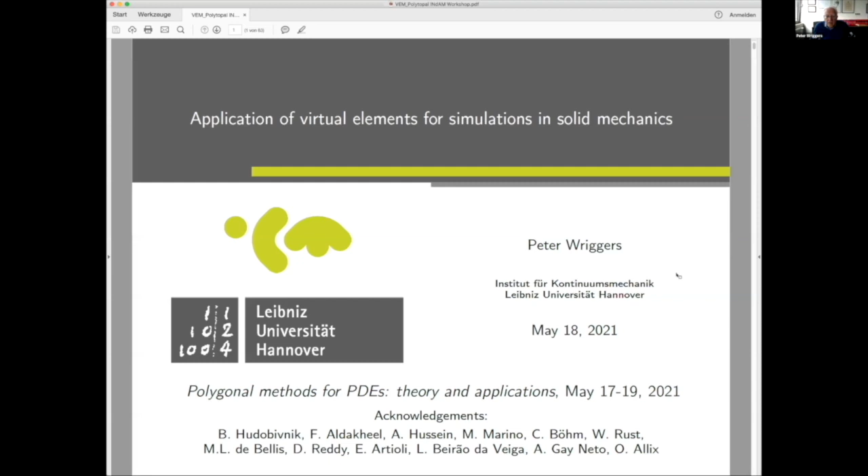Let me start with a motivation for what I want to talk about. Contact mechanics is one problem which we already saw yesterday in the talk by Eduardo. The other thing is fracturing processes, and I will talk about the benefits of using a virtual element method. Homogenization is part of my talk. Something for large strains and large deformations, crystal plasticity - the word crystal already shows, if you can see my mouse here, this is a crystal like this, which we are investigating, that you can really use the virtual element method quite nicely.

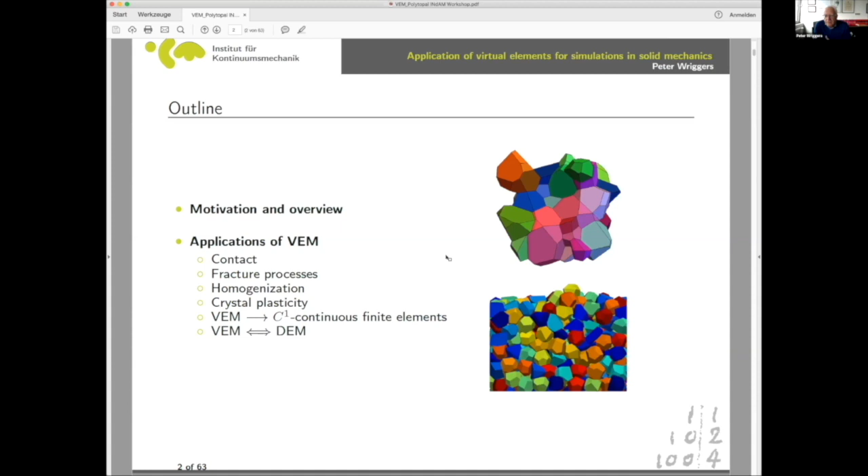I was very glad that Franco talked yesterday about C1 continuous elements. We also had a look at it, and today you will not only get the theory, but you will also see some numbers, and it's very exciting how the elements perform as finite elements. Finally, I had the idea, and we are working together with Alfredo Gay Neto from Brazil, on using virtual elements in discrete element codes as single elements which can deform and are in contact. You see it down here.

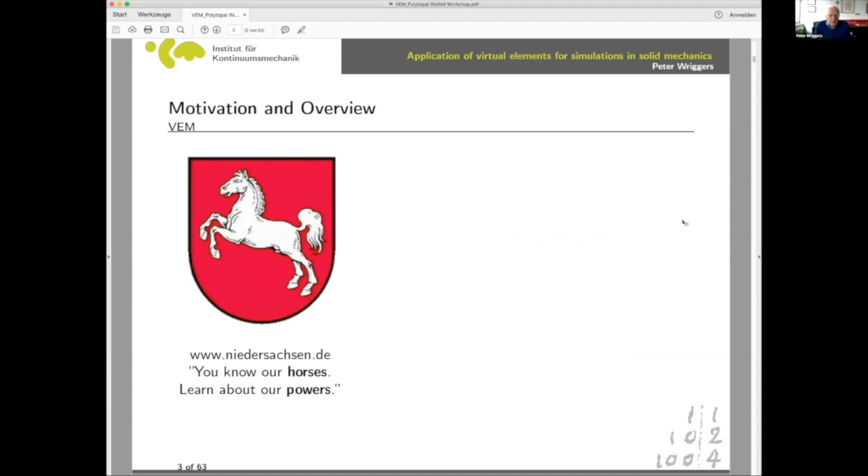Now, I come from Lower Saxony. This is our coat of arms, and while our ministry has a big thing about our horses learning about our powers, I only put this picture because everybody knows that the virtual element method is ideally suited to map into something like horses.

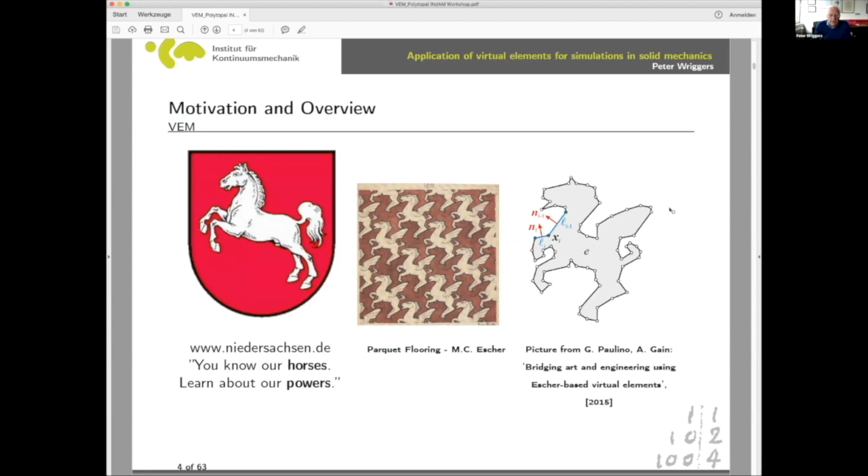What are the advantages for engineers? The advantages are that we have an element with an arbitrary number of nodes, we can have a non-convex shape - this is great - and it's basically only defined at the boundary, and C1 continuous ansatz functions are possible, which is good for Kirchhoff-Love plates and shells eventually.

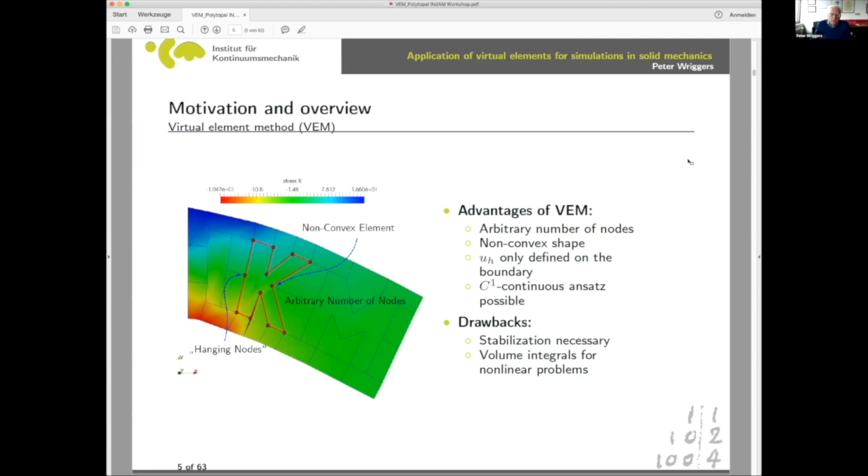Of course, from the engineering point of view, there are some drawbacks. Engineers don't like stabilizations because they have parameters which are not directly coming from the physical problem, so you have to find out that you don't get a solution which depends on stabilization. On the other hand, stabilization is quite interesting for coarse grid accuracy. The other thing, a little bit annoying, is that you cannot move everything to the boundary once you go into nonlinear problems, so you have to integrate over the elements.

Now, what is my basic interest? I have an interest in non-smooth problems. Many engineering problems are non-smooth - contact with friction, plasticity, fracture mechanics, they are non-smooth. That means you need a method to solve these problems. Of course, we want accurate solutions, which would mean adaptivity, and engineers still like coarse mesh accuracy.

Because in 2D, it's no problem - you can solve a million degrees of freedom on your notebook. But if you go 3D, you don't solve 100 million degrees of freedom, so you have to have a coarser mesh. You cannot always do refinement. Either you use adaptivity or you have good coarse mesh accuracy. So for a real engineering application, this is somehow necessary, at least to my taste.

Now, the implications of non-smooth problems are that we can quite nicely use low-order discretization schemes. Higher-order discretization schemes are always trouble - if you try to solve non-smooth problems using isogeometric analysis, it can be done, but you have to do a lot of tricks to achieve it. The benefit of using a low-order discretization scheme, on the other hand, is that your integrals, which usually depend somehow on gradients in our applications, become constant. So integration for nonlinear problems is not necessary, and this makes it an easy to implement method.

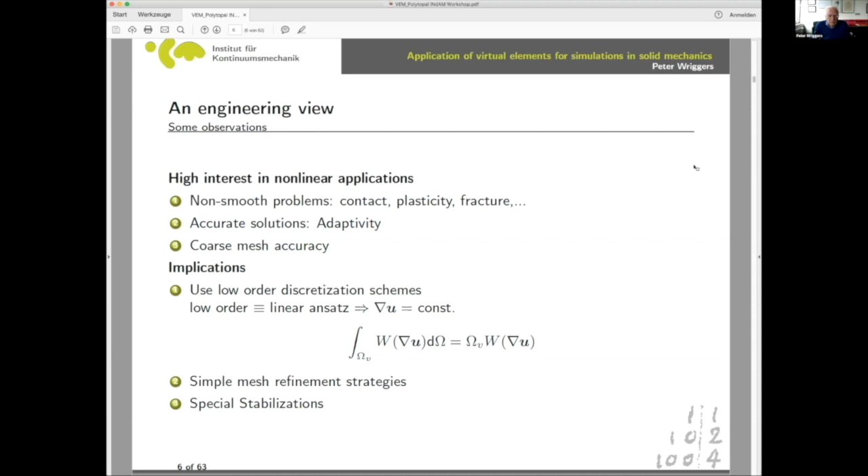What is also good with virtual elements are the simple mesh refinement strategies, and about the stabilization I have already talked a little bit. Now, the advantages of the method in engineering applications.

My first connection to virtual elements came when Franco gave a talk at a conference about the virtual element method, and I immediately had the idea that contact problems could be solved with this method quite nicely, because contacts have different difficulties if you have non-matching meshes. So from this point of view, a node-to-node concept can be used for unstructured meshes and also for large strain computations. This is quite nice.

The other thing is, if you look at fracture mechanics, your elements start to break up, and it's pretty easy to define new element shapes during crack propagation. So this is also something why we looked at the virtual element method.

Adaptivity, I think a lot of people have already said this. Hanging nodes are not an issue inside some virtual element discretizations, so this is fine. Homogenization is also a question. Crystals can be modeled with only one virtual element, which is great, but then of course you have to check whether it really works.

Again, element design: C1 continuity, VEM elements can be sort of used as finite elements, as Franco pointed out yesterday. So it's good to have a look at whether these elements are really performing well in some sense.

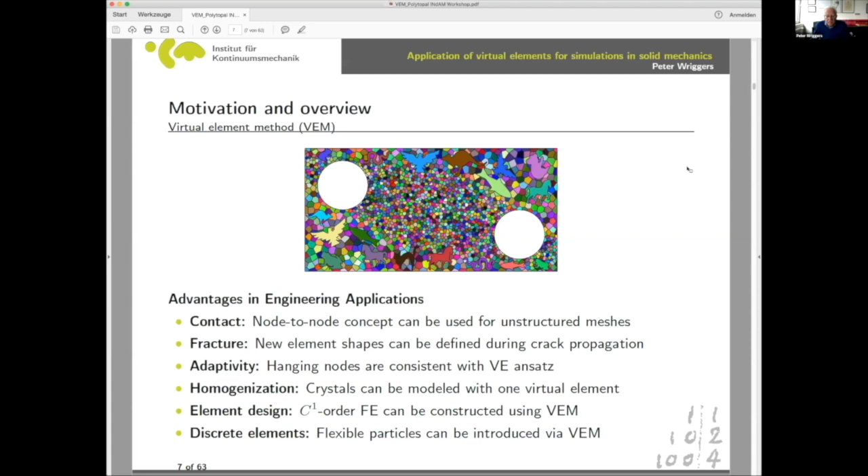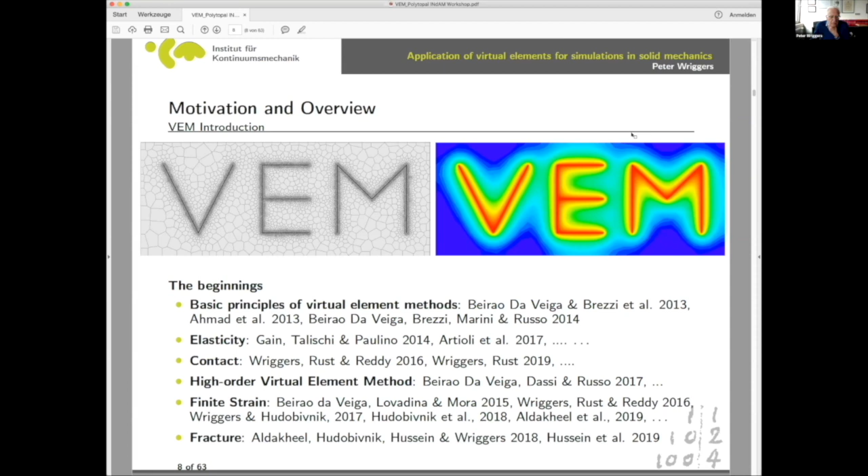Now, I think with this kind of audience, I can skip these slides. This is all about the definition of the virtual element method. As I said, I am interested here in a low order ansatz, meaning I use a polynomial of degree 1.

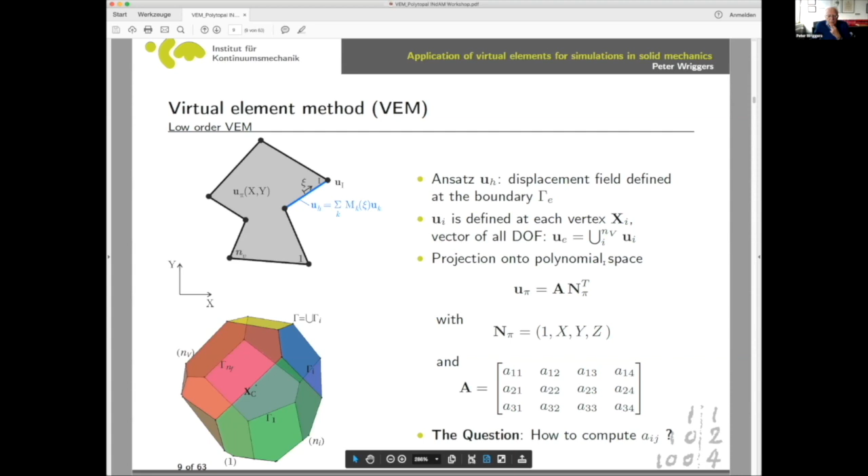Then I have to compute, in the 3D case, the projection, and this can be done quite easily because in the linear case all the gradients of the polynomials are constants. If you then use the Galerkin type projection, which is classically used, you can directly evaluate your gradient in terms of the boundary integral. And this gradient will basically already be the same as the parameters A_ij, which you need to compute in your method. So this is quite easy.

An extension today for nonlinear cases with higher order elements is given by Blaž Hudobivnik today at 12:25. So this would be sort of an extension to what I'm saying here.

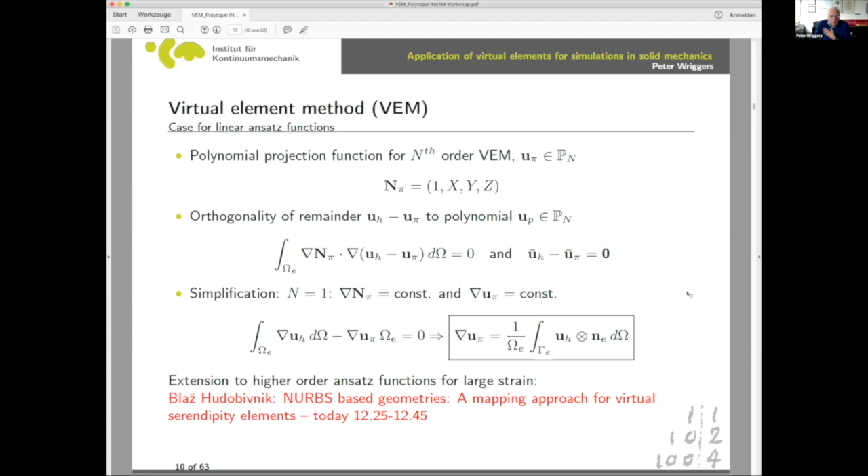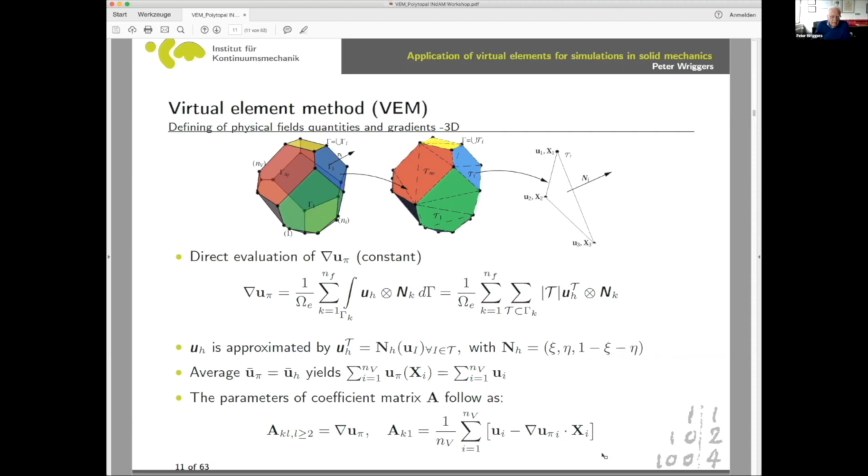So we can compute these parts, and then, once we have the ansatz polynomial of the projection, which I call u pi—I think you usually call it pi of UH, it's just a shortened notation—we can basically compute the strain energy. I like to use the strain energy instead of the weak form. I think it's only a matter of taste, you can do whatever you want.

The only thing we found out is that we always use this automatic symbolic system to generate all our matrices, which was developed by Jože Korelc. And we found out that if you start from the potential, you get the most efficient code. Don't ask me why, but this is the case, and that's why we like to use the potential.

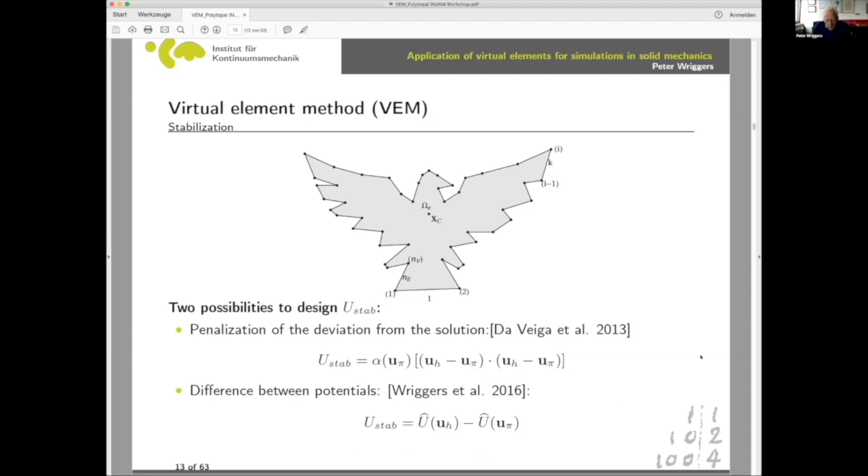Another possibility, which we introduced to get better coarse grid accuracy for some nonlinear problems, was to use a difference between potentials. This is also consistent, because the difference of the potentials, once the mesh size goes to zero, basically vanishes, and you get the solution of the consistency term.

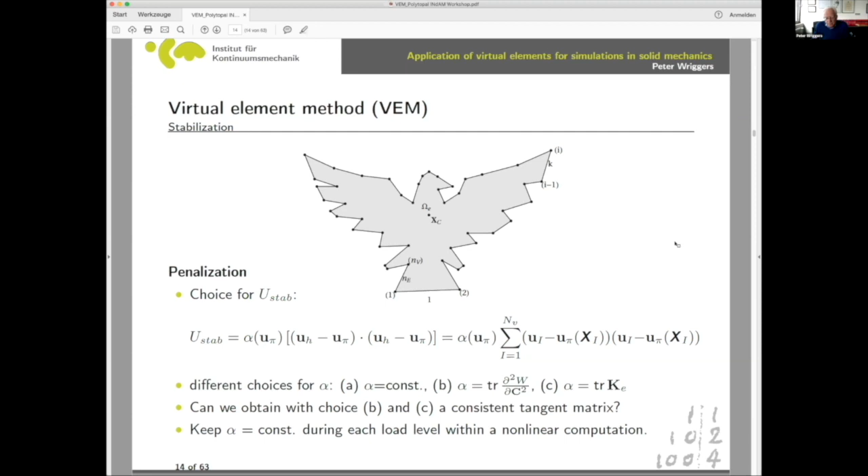Now, the problem with this penalization, which I call the classical stabilization and which is always used, is that either you choose alpha equal constant, which does not really work for nonlinear problems, or you can make alpha depend on some variables, like the stiffness matrix or the trace of the constitutive tensor. But this makes linearization a little complicated, because you then have to linearize these terms, which is sort of messy. What you can do is keep them constant during each load step, and then have some sort of Newton method within each load step, but this eventually avoids using large load steps.

With the other stabilization, there is no problem. You have to define this potential, but this can be defined as the same potential which you use for the consistency part. The only drawback is that here you have a potential which depends on UH, and now the question is, we don't know UH within the elements. So I thought to make a mixture of finite elements and virtual elements, where I use a finite element triangularization which actually has the same number of nodes, so we do not introduce extra nodes.

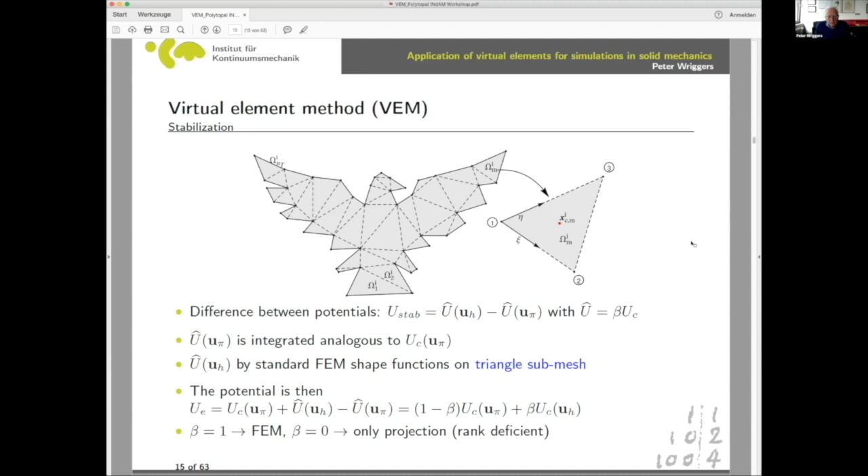This can also be done in 3D, using this stabilization for our computations. There are some papers where we showed that this works, and it actually works better than just using the finite element approximation inside, which would be obvious to check.

Now, let's first go to contact problems. Contact problems, as I said, was sort of my beginning of the virtual element method, and also had, in the beginning, a little bit of a problem to understand what was going on. But luckily, there was this Hitchhiker's Guide to the Virtual Element Method, which really helped.

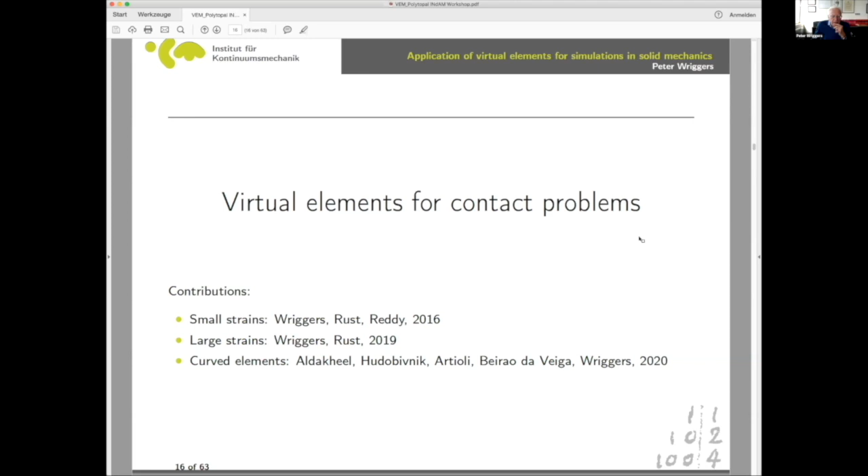We have done some work on small strains, on large strains with classical approaches, and then also used the curved elements, which were developed by Eduardo Artioli and Lorenzo Beirao da Veiga, and have done some joint work together.

So what is the general thing if you classically look at finite element methods for contact? Classically, you have a node-to-node approach, but if you have a non-matching mesh, this doesn't work. So the next thing is node-to-segment contact, which you can formulate - we did it also somewhere in the beginning of the 80s. The problem there is that it does not fulfill some sort of patch test if you have a constant load on the contacting surfaces, so this does not lead to constant stress when used in an interface.

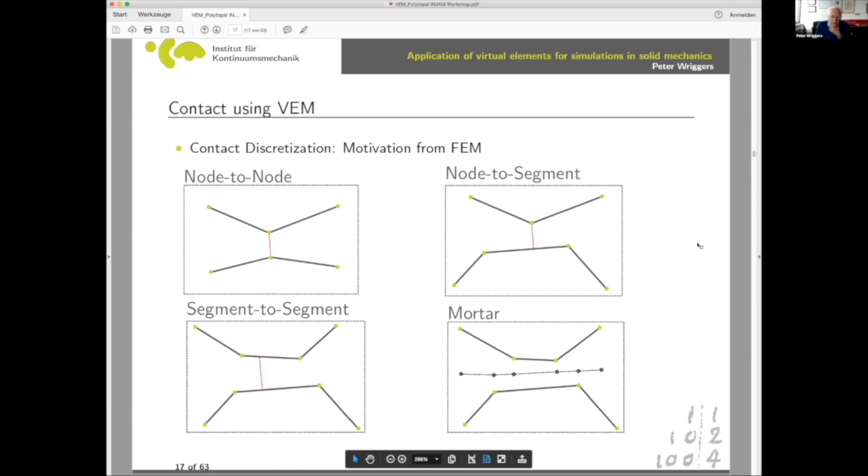Of course, engineers have seen that, and then they introduced something like segment-to-segment or mortar methods, which somehow alleviate these problems, but they are very complex and complicated. The good thing is that with the virtual element method, if you have a non-matching mesh with black nodes, you can do a projection from the black node to the opposite surface and insert a node there in your virtual element, which is completely allowed and gives a nice approximation.

So by doing this, we actually define something on the right side, which is some sort of a segment, where here is the original node, here's the projected node, and so on. You can basically define the gap, and define a linear ansatz in between, or whatever ansatz you use for your virtual element. And you can write the contact terms down here.

This is sort of a penalty approach where the gap function is squared times the penalty parameter, or you can use a Lagrange multiplier approach, or other approaches to solve this problem.

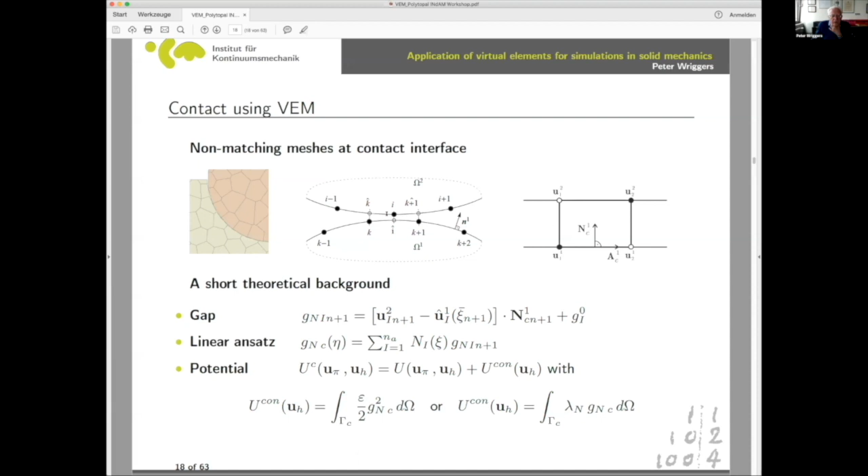This is very nice because this stuff only acts on the boundary, so you can just insert your UH, which you have at the boundary. So from this point of view, it's a very nice method, and it also fulfills all the properties you want.

This is one example already shown yesterday by Eduardo. It's sort of a ball on a curved contact surface. If you use, for example, a node-to-segment contact here, then for a coarse grid, you get

all these sort of jumps in the stress field. This is sort of the normal contact stresses here in this case. If you refine the mesh, you eventually get the correct solution.

Now, if we use our node-to-node contact with the curved method, with the curved elements derived by Eduardo and Lorenzo, then you can see that even for coarse meshes, we get a much nicer approximation of the stress distribution.

This is actually something like the von Mises stresses within this contact interface. Because it's von Mises stresses, you do not have the direct matching of the normal stresses in the y direction.

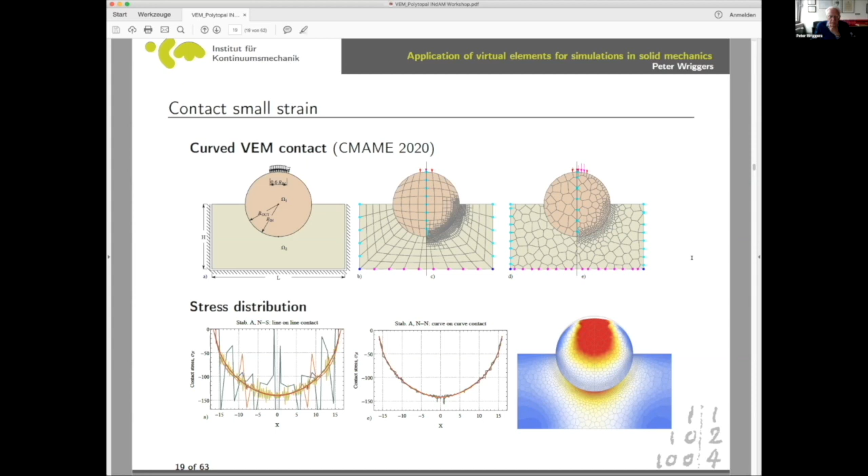Okay, this is for the linear case. For the nonlinear case, it's a little bit more complicated. I did a little bit of a drawing here.

What you have is at a certain instance, like here is sort of one point of the body above, you can do the projection for a time step n. And if you go to the next time step, of course, you have some sliding on the surface, and due to this, this point changes.

So you always have to update your virtual element mesh somehow, at least at this boundary, where you basically insert the new node. This is, of course, a little bit more complicated, but it can be done even with friction.

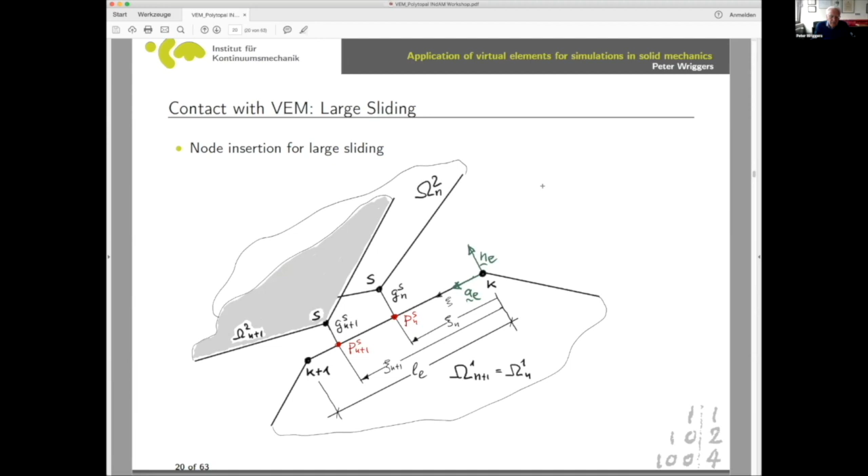We have shown that — I'm not going into the details here — but you can see if we want to run something like this, this is sort of what we call an ironing problem.

So you have this little block, which is a little bit more stiff. First you press it down. This is this situation here, and this is the stress distribution in the y direction underneath.

And then you start moving this thing on the surface while pressing down. This is a large strain computation, so there is no scaling factor for the displacement field — this is a real displacement.

And you can see that we can move this block over the surface. I have a nice movie, but somehow my PDF viewer doesn't like the Beamer movies inside, so I can't show it.

What you can see is that we get a certain reaction force. First, when we press the whole thing down, we have a linear sort of incline of the reaction force. Then when we move it over the surface, the reaction force sometimes goes away because there's less stiffness of the body underneath.

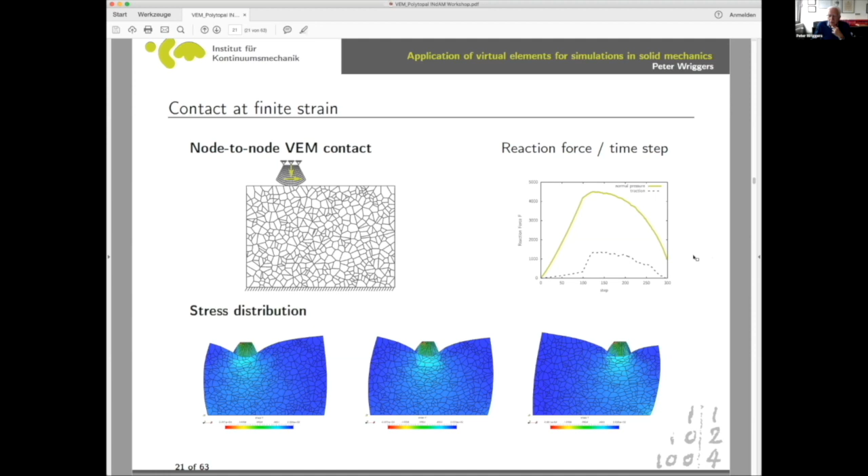So this makes sense, and this is the related frictional traction that comes with this movement. So it works for contact — this is nice. At the moment, we are working on the 3D extension of this kind of method.

The next thing is crack problems. This is also very interesting for engineering, and we have worked in different areas here — linear elastic fracture mechanics, the phase field method for brittle and ductile fracture, and combined approaches, which we also use where we coupled the phase field method with some fracture features.

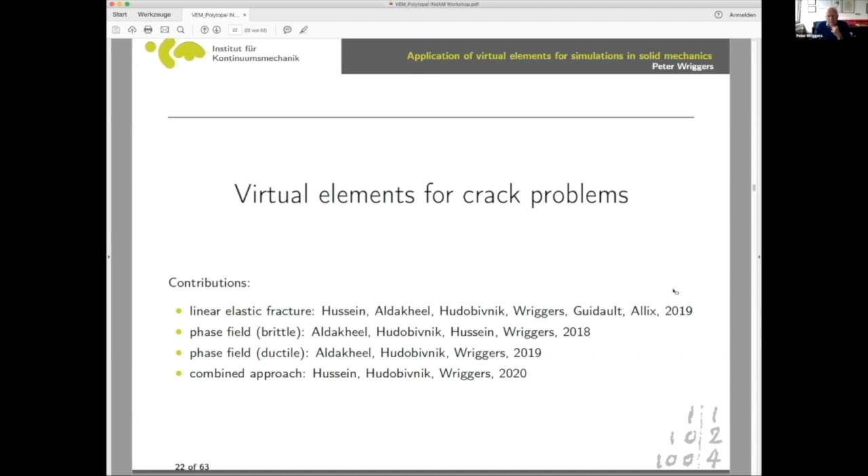Classically, you can say, okay, why do we need all these kinds of things? There's a lot of things already done.

You can see it here. People have developed the XFEM, the damage mechanics, phase field, cohesive zone elements. A lot of things have been done.

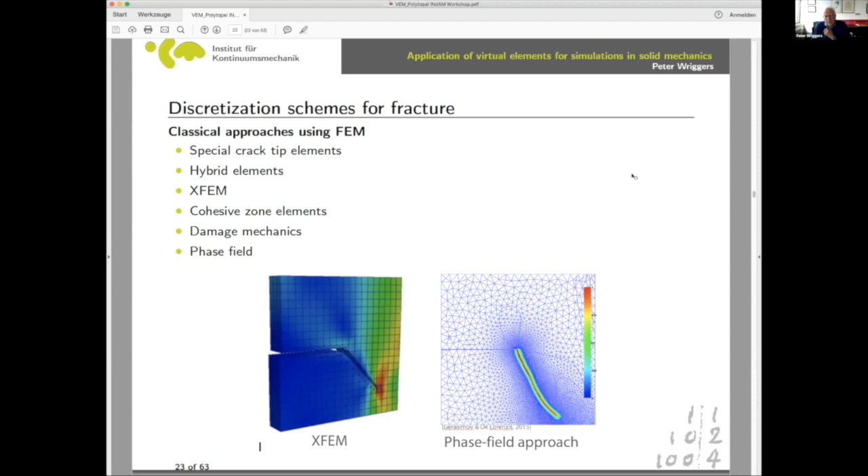Classically, if you use a phase field approach, for example, you have to refine the mesh very much in the vicinity of the crack, because otherwise this method will not produce the correct result. The problem is that sometimes you don't know beforehand where the crack is and how the crack goes, so eventually you need some adaptive structures for that.

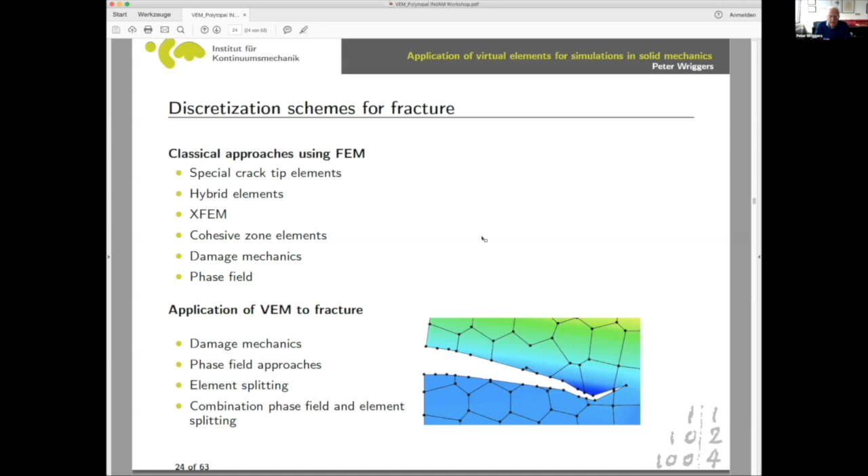Now, why could we use a virtual element method? The virtual element method has some sort of features which could be used quite nicely. We can split elements quite easily. We can even have elements like here on the right, where you have sort of a kink within the element, and this works quite nicely.

So this is basically the idea. You can somehow compute the crack path by basically opening up the crack somewhere in the element, and then look at it and cut your mesh. Now, the question is, of course, how do you do this, and how can we compute the crack opening and the direction in which the crack will go?

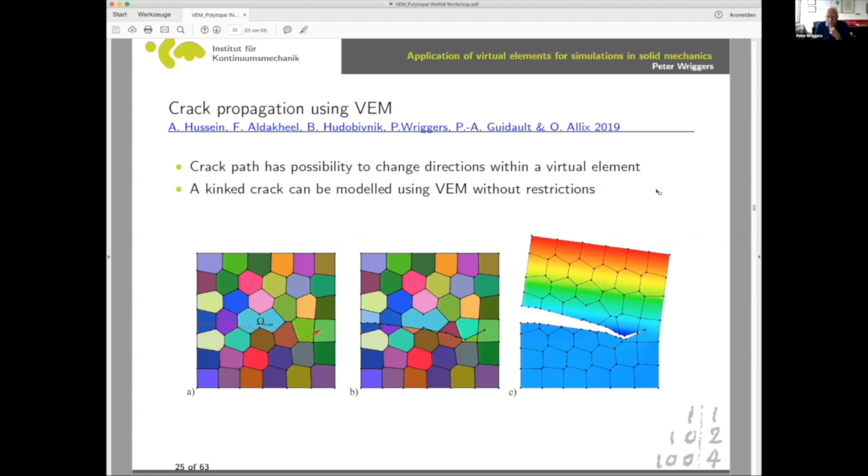This can be done classically by what we call interaction integrals, or the more general J integrals. These J integrals are contour integrals. So if this is your crack tip, you have to look around the crack tip and integrate some energy contributions, and this actually allows you to compute the stress intensity factors, which depend on this interaction integral.

Once you know the stress intensity factors, you can compute the shear stress at the crack tip, and you can also compute the propagation angle, so you know in which direction the crack will go. Finally, you can say the crack propagates once your stress intensity factor is larger than the fracture toughness, which is a material property.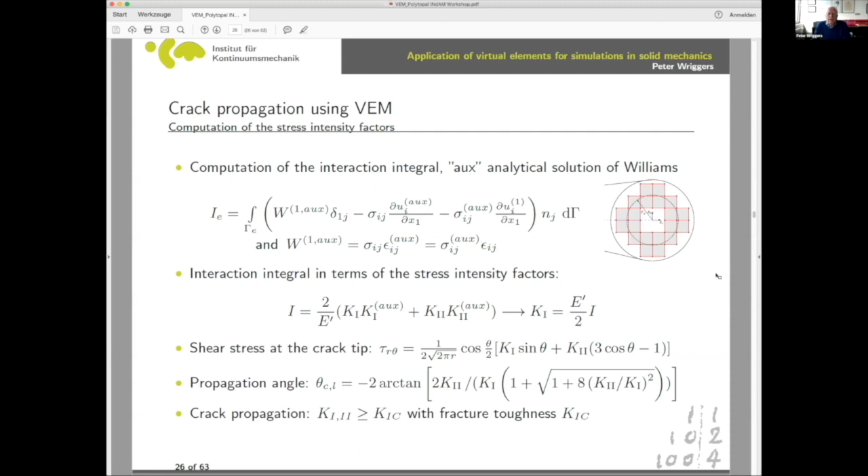Now, this is an extremely short view on the background, and the question is, does it work? So first, of course, we checked whether we can compute the stress intensity factors with the virtual element method, and we used a mesh where we put this under tension and changed the angle of the existing crack.

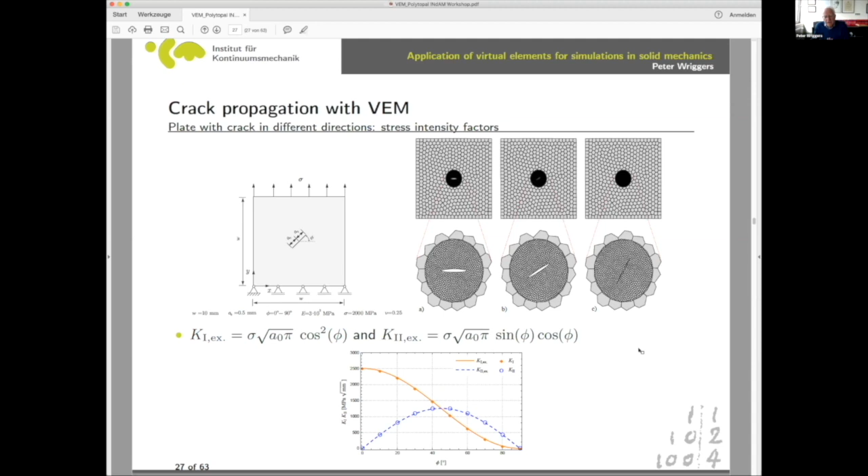Now, of course, the next step is what we do. You always have to assume in these methods how long the crack is, or what is the increment of the next crack. We can compute this angle as I've shown. So we establish some crack length, then compute the next node, for example here, and insert the crack.

Now, if in the next step we have a longer delta A, eventually we will end up within an element, and then we basically extend the crack up to inside that element, defining this very non-convex element with the crack. And then, of course, we have to keep going all the time.

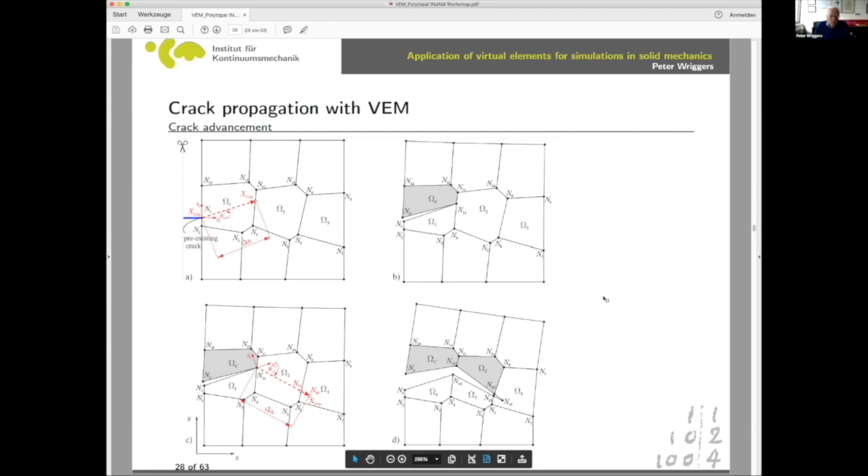Let me just show this in this example. It's a classical example. You have an initial crack here, and you have basically the shearing load up there, and you want to compute the crack path.

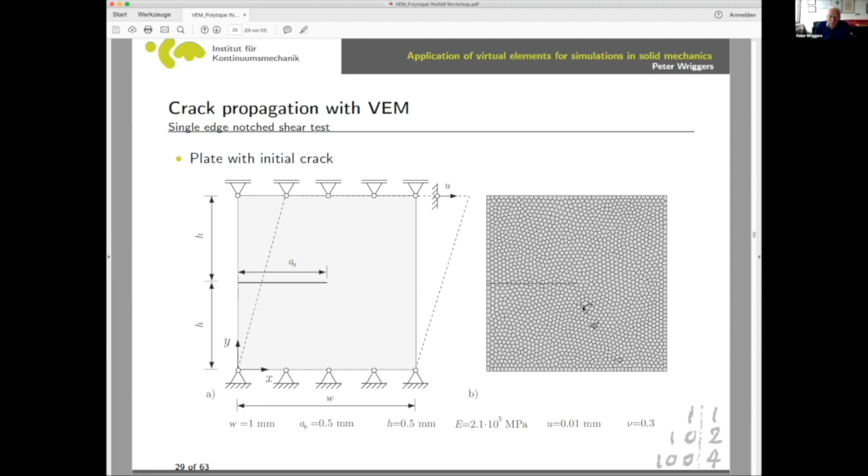You can observe that we purposely put in here some little animals instead of the classical Voronoi cells. This was only to show that we are able to compute the crack path even through these very complex shaped elements. So you can see it here. When the crack path starts, it opens up and nicely bypasses all these animals, and it doesn't matter what shape of element you have, you can really compute the crack path.

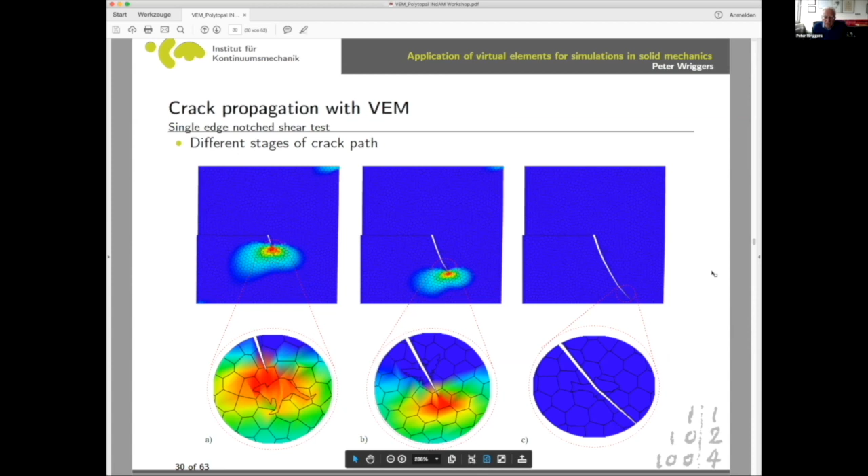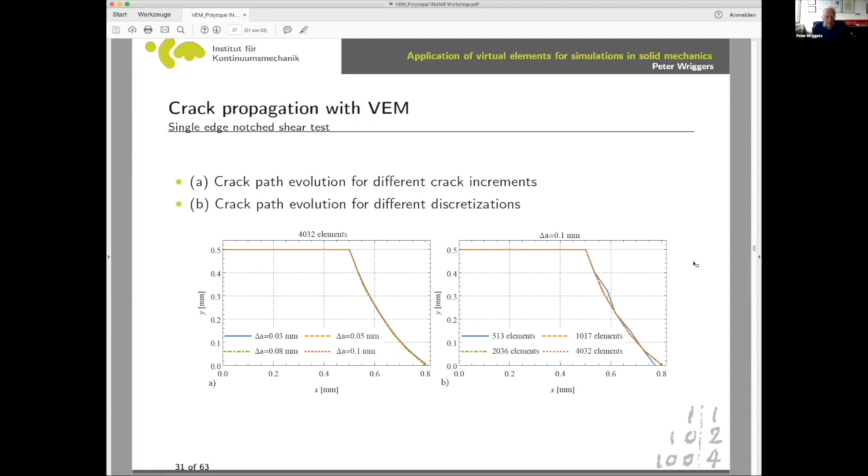Now the question, of course, is this correct? Here you can see that depending on the delta A, depending on the number of elements you take, you get basically the correct curve, which is the crack opening via X, and this works quite well. So this is actually the crack path which we can approximate. There's a reference solution, and we approximate this quite nicely with our method. So this can be applied.

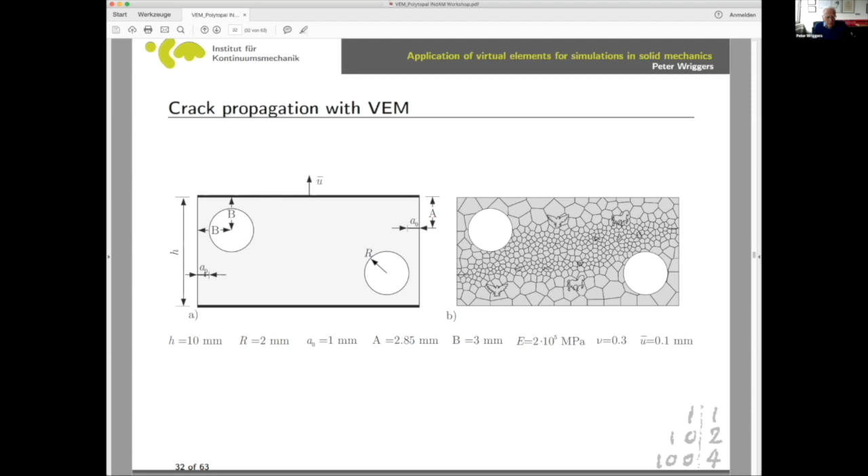For more complex situations, we pull this thing and we have two initial cracks here. You can see how the cracks basically move through the body as we increase the displacement field. You can also see the stress field, which is concentrated around the tip.

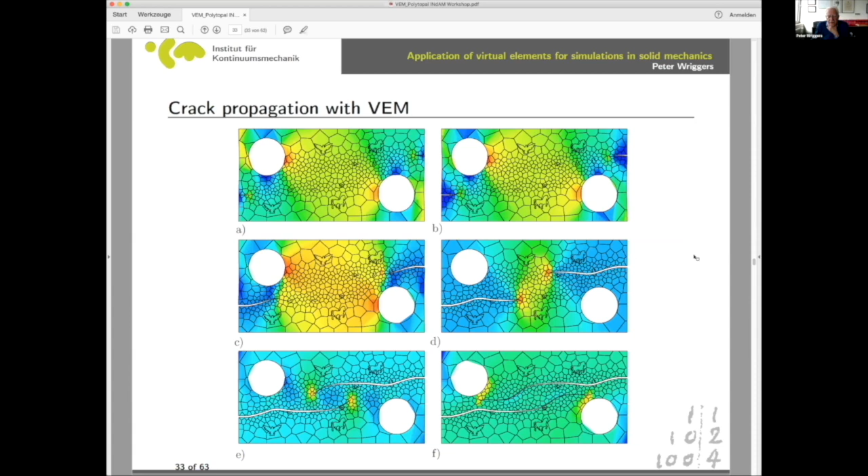Also here, the crack does not stop moving through the solid. Now, this is nice, but if you go 3D, it's very complicated to compute this interaction integral and the path. So the next step would be to use eventually the phase field method. I also advertise a talk by Fadi Aldakheel this afternoon, where he talks about virtual elements in fracture mechanics.

I just want to show what we have done. The idea was that we start with a coarse mesh, refine it, and use at the crack tip something like the phase field method. That's what we want to do. So we have to compute an error indicator, and we use here the phase field parameter to do that, which is without any proof, but it seems to work.

We can then, by this error indicator, select a threshold of elements which we want to refine. Then we can do a refinement, using finite elements or virtual elements. So we have this kind of refinement around the crack tip, which is used to compute the phase field. With the phase field method, we obtain automatically the correct direction of the crack path.

Now, the idea is that we sort of follow the crack path. Once we have the crack introduced by the phase field method, we open it up by our cutting procedure and then keep going with the crack path. So how does it work?

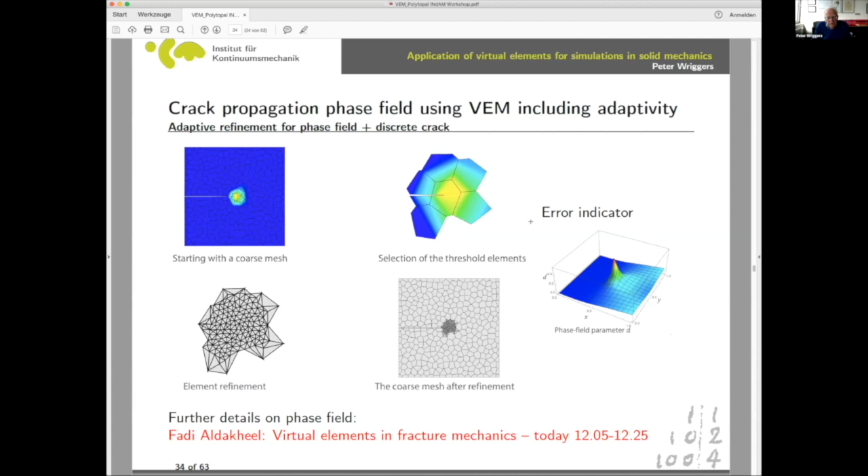We have again the same problem as before, like here. Now what we do is we basically refine the mesh around the crack tip using our error indicator. This is a solution with the phase field method. Then we cut the elements, which are here the red part, and introduce the crack, moving the refinement together with the crack as we keep going.

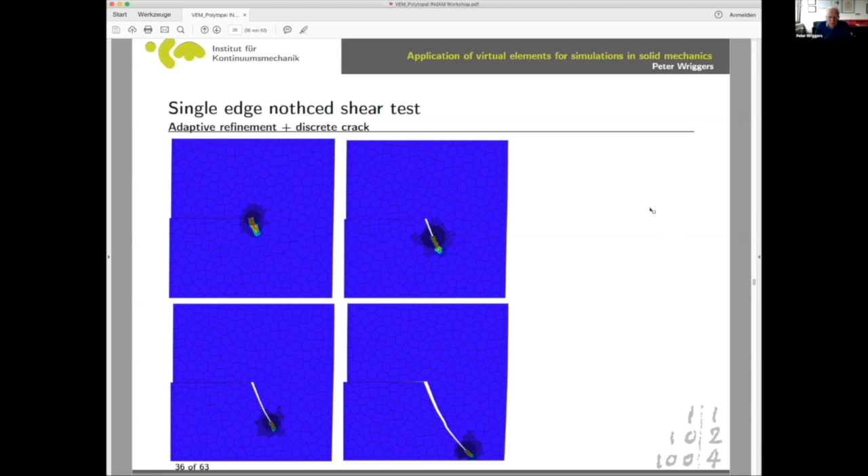So by this, we have a very efficient method because we only need the refinement around the crack tip, and we can cut afterwards our elements using our schemes, which we have developed and which is very easy when we use the phase field method. This has not been done yet in 3D, but this is actually the way you have to go in 3D, because crack paths are much more complicated and very hard to compute using the interaction integral, and also very hard to compute even using XFEM or other methods. So this is an advantage we can take care of, which we have not done yet.

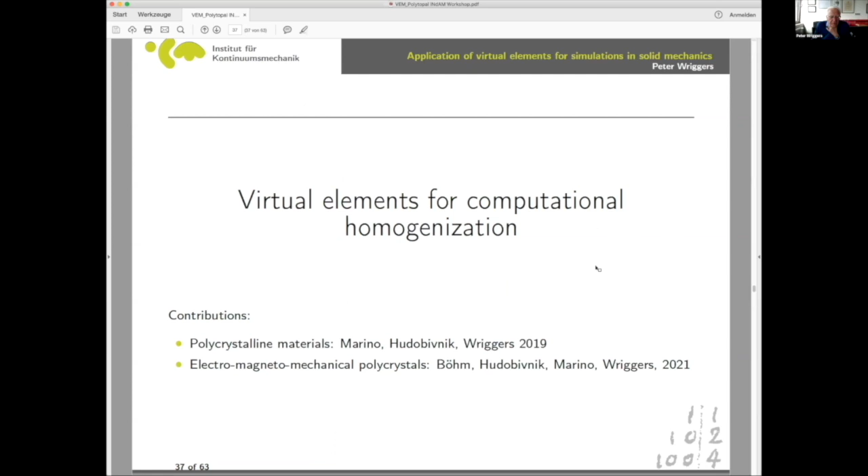Now, another topic: homogenization. There, eventually what you want to do is compute the properties of a macro material which you want to use for computation. But this macro material has a certain microstructure with different constituents, and you want to be able to homogenize it. I think yesterday Eduardo talked about this already.

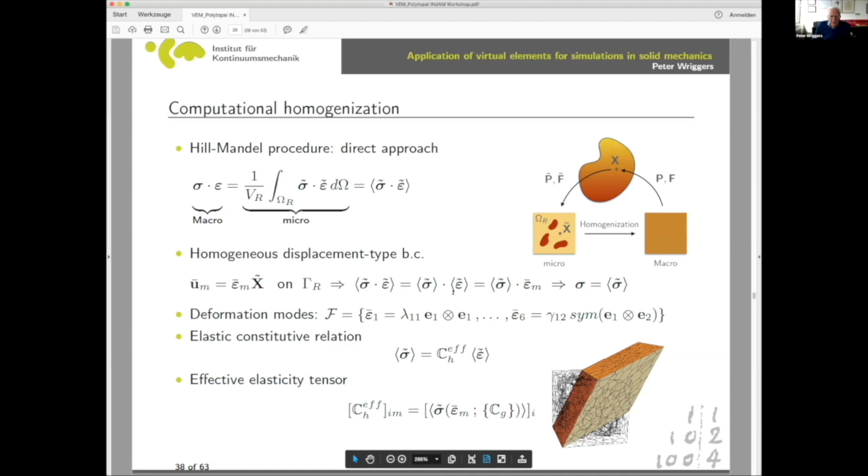So what we want to do is check whether we can use this virtual element scheme for homogenization. This here is basically all the methodology you have to do. We have to apply certain deformation modes on the microstructure, and then we can obtain the coefficients of the elasticity constants.

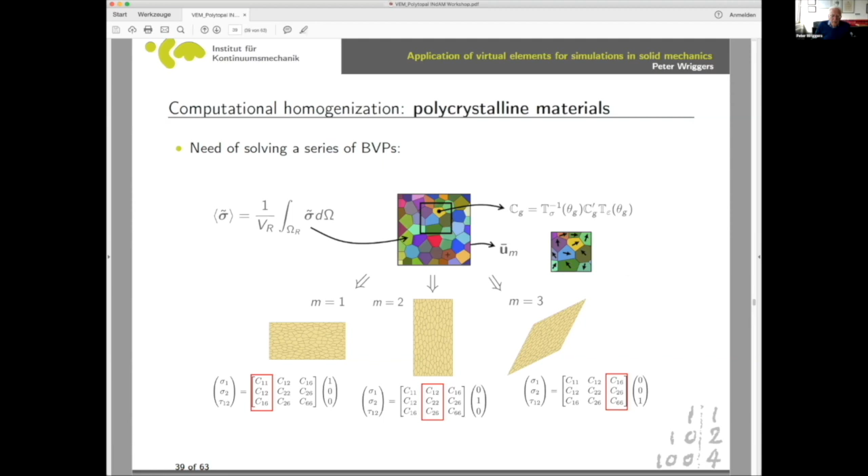Now, we made it a little bit more complicated. We have a polycrystalline material which has certain directions of anisotropy, which you can compute or see. The question is, does the virtual element method really work in this case? So we tried this with different materials, which are orthotropic and transversely isotropic. We used here the anisotropic index to characterize this.

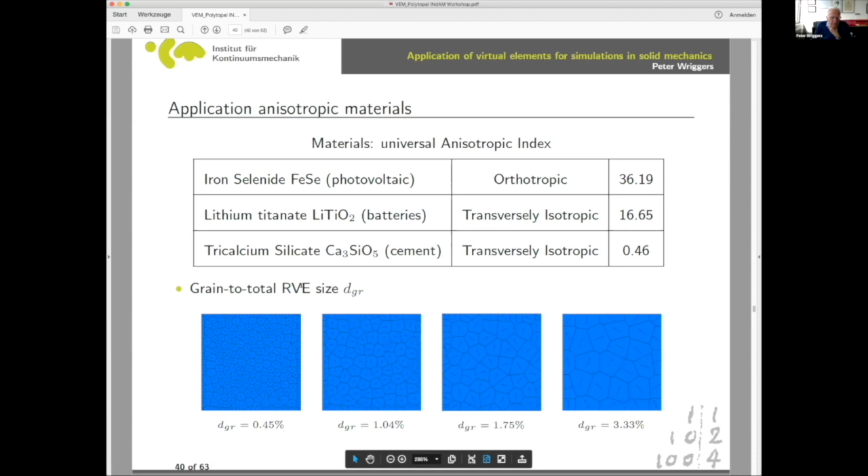Index equals 0 means isotropic. So this is weakly isotropic or almost isotropic, and this is really orthotropic. We used these different materials to investigate that. And then, of course, you can also have the degree of grain size with relation to the RVE size here.

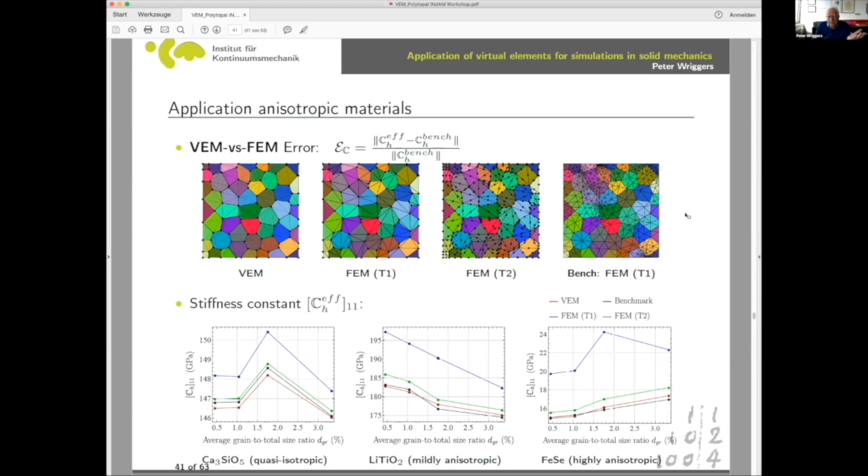This is a stiffness constant 1,1, but you can also do it for the other constants. Interestingly enough, the virtual element method always is as good as a reference solution, even better than the T2 discretization of this kind of method. The question, of course, is why is this the case? This is great because it means we can use it for homogenization purposes.

One idea is that when we use a coarse FEM mesh, you can see that the results of the stresses are very much scattered. This is the stress field of the fine mesh, and this is a VEM mesh. You can see that the VEM mesh reproduces the fine mesh results a lot better than the coarse finite element method. This means VEM doesn't lock somehow in this response, and we get a very nice solution.

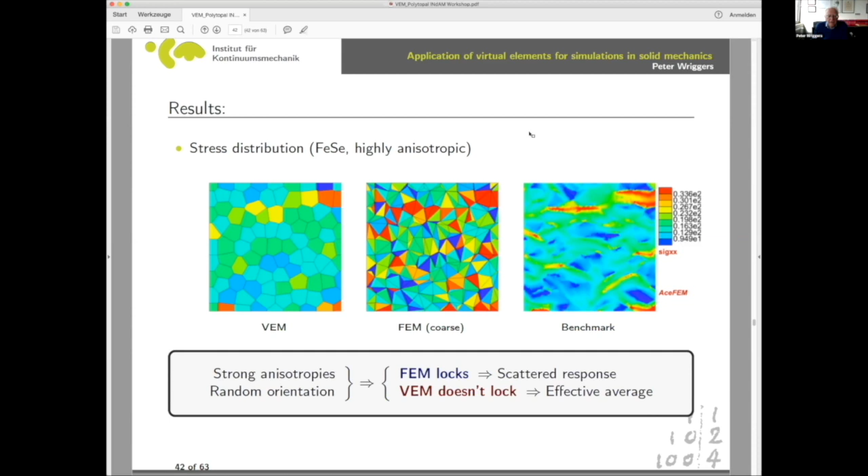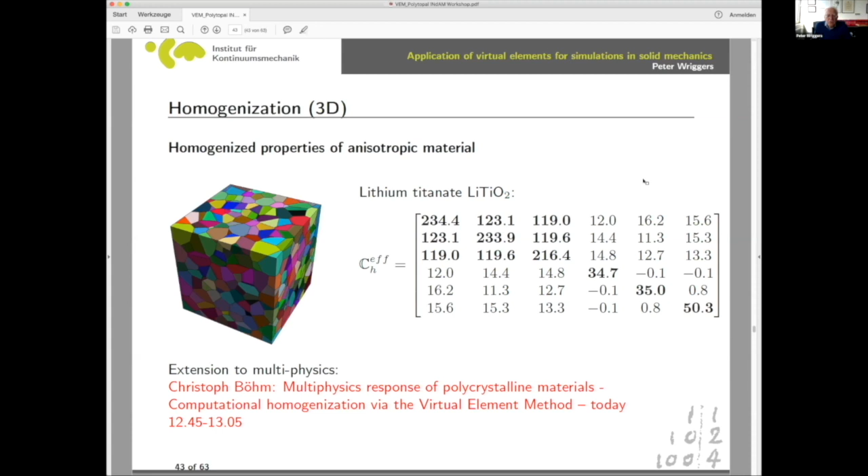That's at least my conclusion in this case. There will be a talk by Christoph Böhm today who will talk about multiphysics response of polycrystalline materials and homogenization, applying all this to the three-dimensional case where it really makes sense, because to be frank, homogenization means you have to compute a three-dimensional material. Otherwise, you do not get the micro response correctly.

Now we can go to crystal plasticity. Again, the question is, can we use a piece of polycrystal material, which is on the micro scale, to also compute homogenization problems using low order VEM? Instead of modeling the whole thing with finite elements, you can also use other meshes. We have done this before, it works, but the question is does the virtual element method also work?

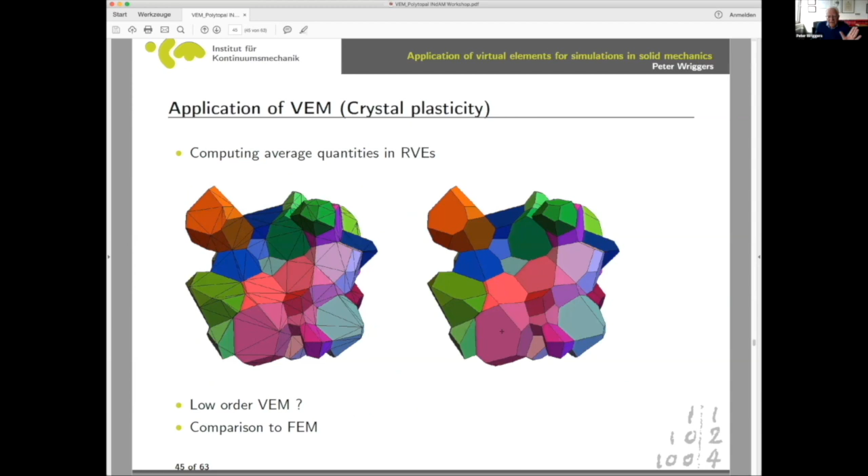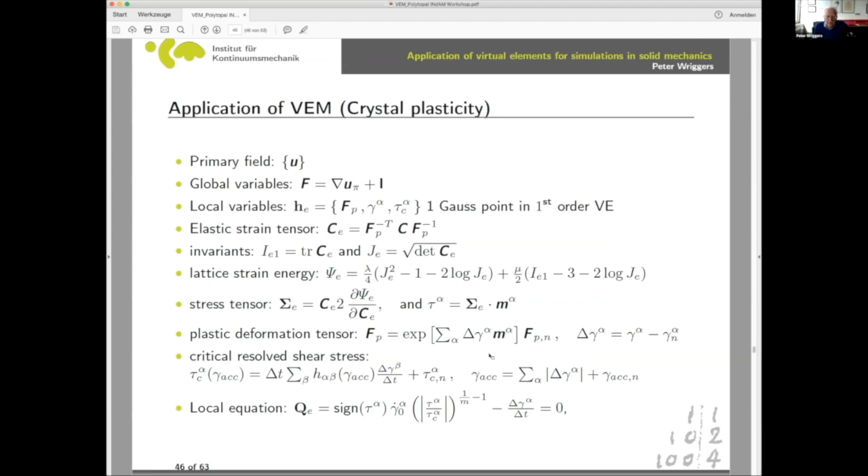I'm not going into the theory. The only thing I want to point out is that we have different sliding directions which can be taken in crystal plasticity, so the plasticity can go in some directions. We are using first order VEM, a linear ansatz, meaning a constant stress within each VEM element. The question is, do we really get a good response with that, because this is quite complex, and the sliding planes can differ across the polycrystals.

I'll jump to the result. We have some homogenized relation, the accumulative plastic shear, with certain periodic boundaries applied. What is interesting is we compared this to a reference solution computed with quadratic tetrahedra elements, with more than 100,000 elements for this piece. We compared our method, with basically 1,700 degrees of freedom, our Voronoi mesh with each virtual element for one particle, against a linear element which is T1, which we call O1 - don't ask me why - and we refined it.

What you can see here is the error with respect to the reference solution. This is what we get with VEM, and this is what you get with the classical finite element tetrahedra. This means you are even better than using 240,000 degrees of freedom. So this is good news, it can be used.

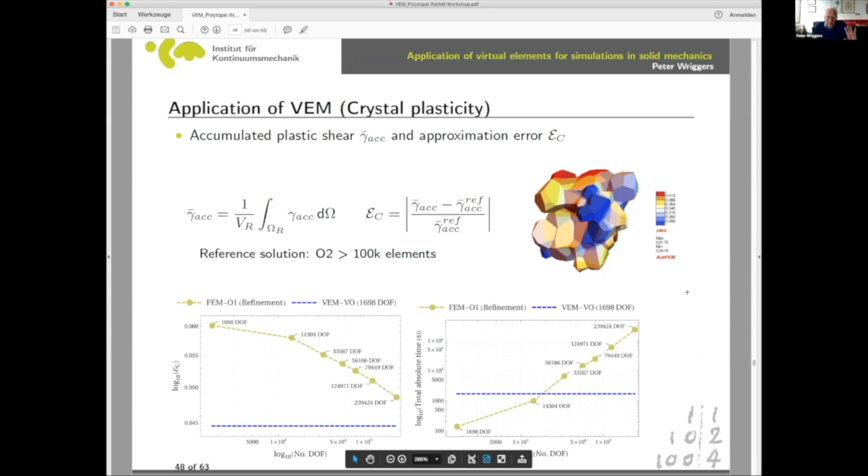The other thing is the total solution time. VEM is slower than the classical normal triangles, but to get the same accuracy of solution, we need this type. If you look at this one - and this is actually a log scale - it goes through the roof. It takes a very long time to compute and is not as good as what we get with the virtual element method. So there's a real big plus for the virtual element method in this regard.

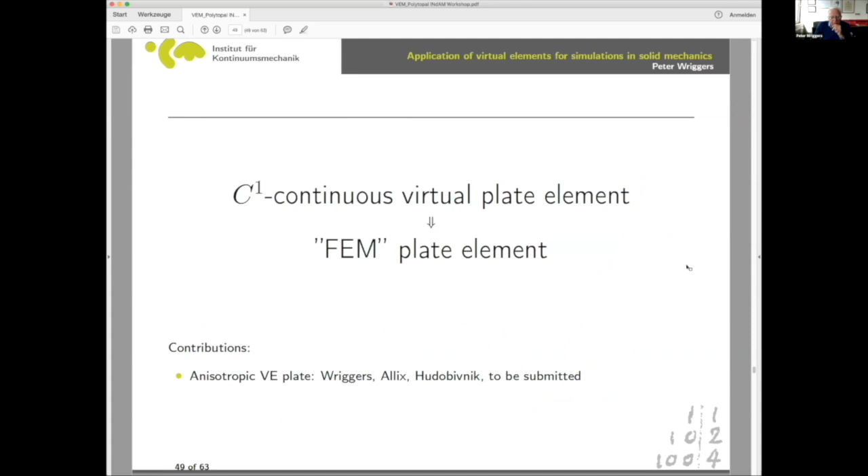Now let me come to the plate, which is something we looked at. We wanted to look at this from the point of view of anisotropic plates and check on that. We took, I think from the paper of Donatella and Franco, the most simple elements. This is one element which has WH as cubic, which you have to choose, as Franco also pointed out. Then we have a linear polynomial for what we call zeta t, which is basically the slope in normal direction. And we have another element which has quadratic terms, which is more consistent because then the rotations are quadratic.

Here, one rotation is quadratic and the other one is linear. Now the good thing is these elements are not used in engineering so much because the good ones are very complicated. And the good thing is that they are locking free for thin plates.

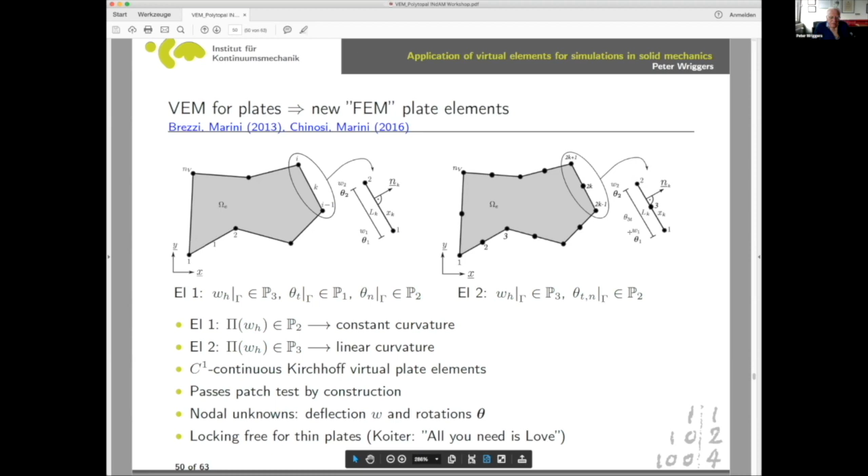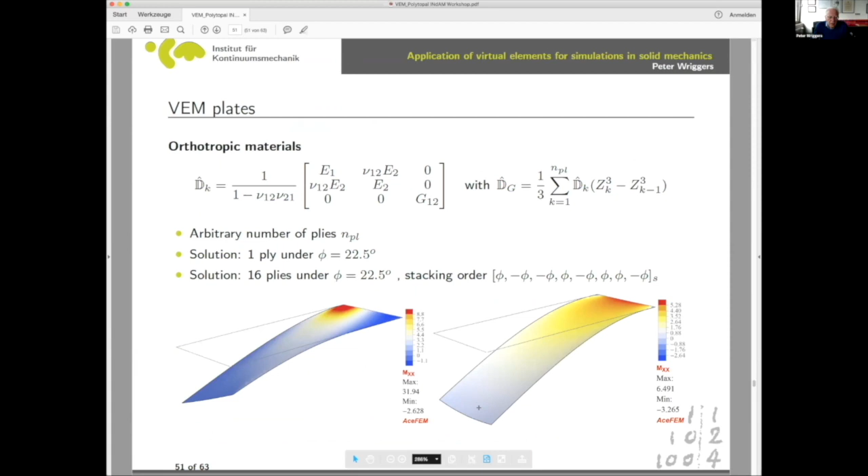There's this old word from Koiter: all you need is love, meaning Kirchhoff love. And we can, of course, use these elements to compute something with orthotropic materials. You can see here the deformations, and for a solution with one ply, which has a certain direction of the stiffest component, or we can use a stack of ply and then we get some symmetric solution. So the element works quite nicely.

Now the question is, of course, can we produce a finite element out of it? The classical thing, we call it virtual element T1. This was the one which had sort of the linear slope for the normal direction. And we have this quadratic element, which is sort of complete, has quadratic rotations and cubic deflections. And then there are, of course, a lot of elements which you can use.

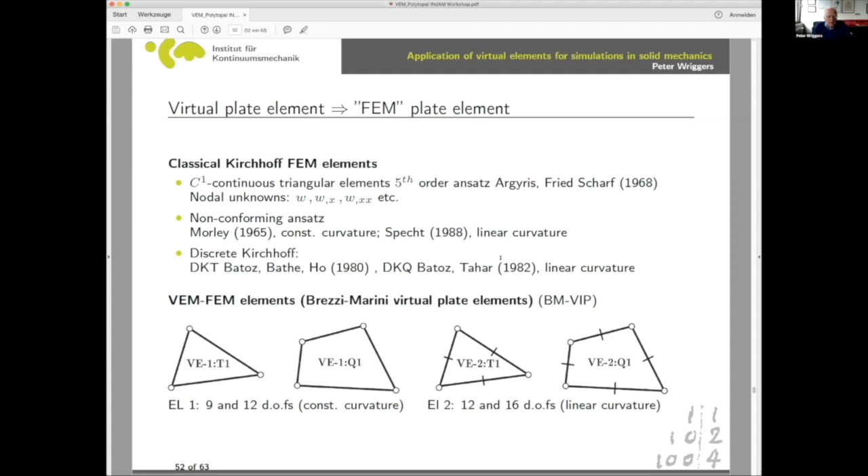There are C1 continuous triangular elements, but you don't want to use them because W,XX is actually an unknown which you don't want. Now the performance of these elements.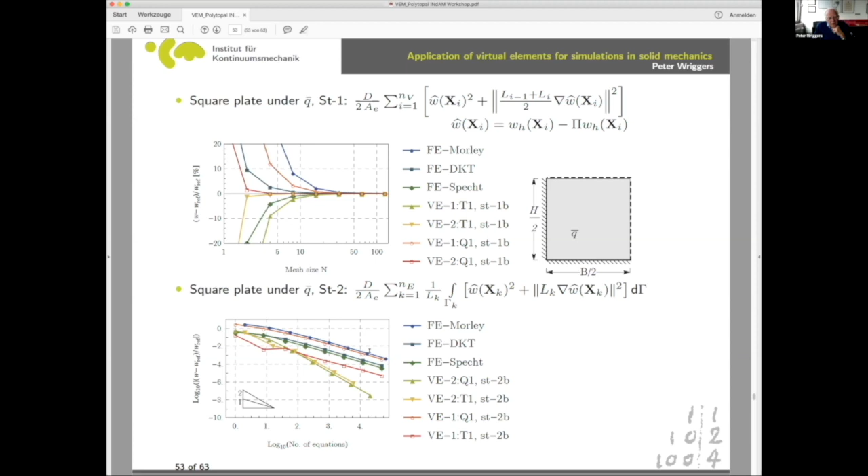But then we also tried another stabilization, an integral over the boundary, which Blaž Hudobivnik came up with. Interestingly enough, the simple triangular element out of a sudden has a very good coarse mesh accuracy. The asymptotic accuracy is, of course, not as good as for element number 2, but it has good coarse mesh accuracy, which you can also see here.

Here we have the pointwise stabilization. It's clear that element number 2, with the complete quadratic ansatz for the rotations, is very good. If you use the continuous stabilization instead, out of a sudden this guy here, the T1 triangular element, is very good. Don't ask me why, but it works very well.

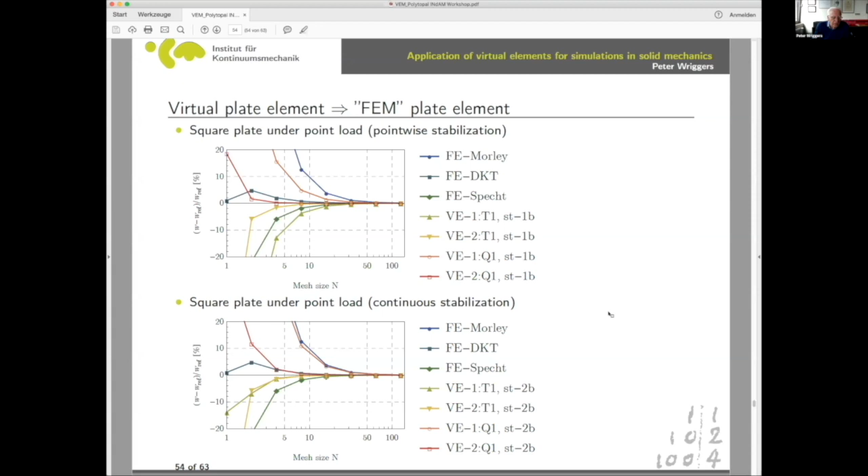And this is actually the element which engineers want to have, because it only has rotations and deflections at the vertices. Engineers don't like so much, also in legacy code, the other thing. And now let me just run through the last thing, which is quite neat.

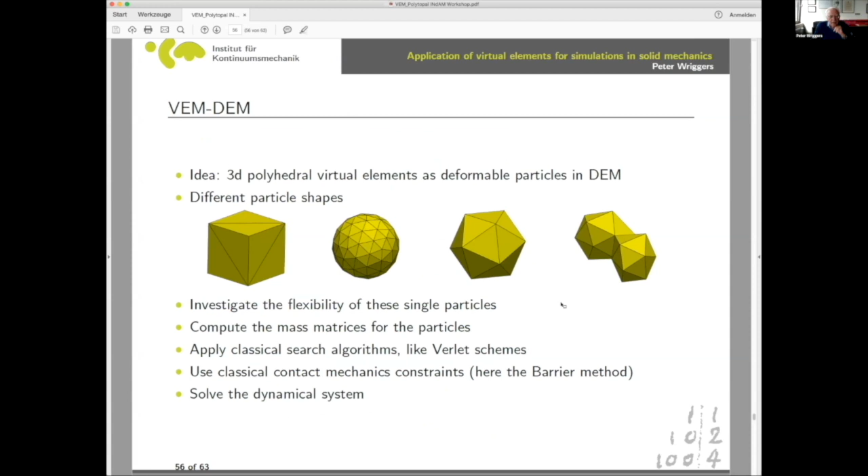So we have actually used the virtual element method for discrete element methods. As you can see here, we have designed different particles, and these particles are flexible. So we actually checked, we compressed these particles and we checked whether we get basically a good performance of the stiffness. There's a reference solution which we actually computed with Abaqus.

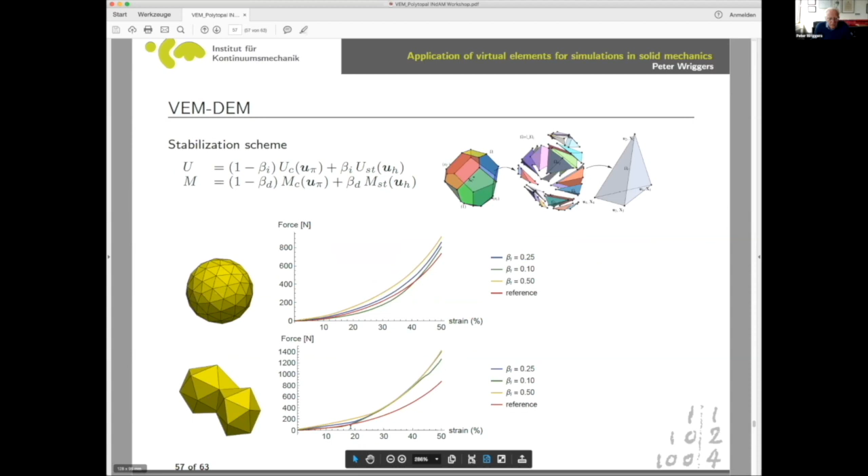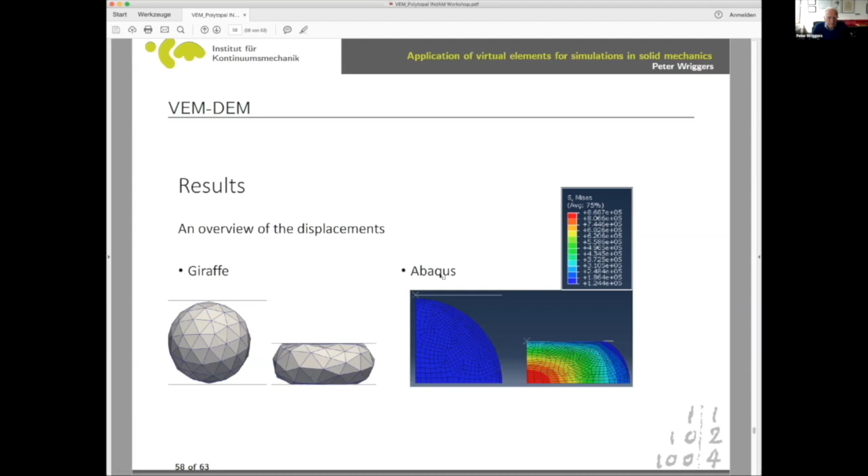Now, this has been used to compute, for example, the compaction of some sand particles in a box. You press it down, and we can get the loading and unloading curves. And of course, this can only be done if you allow elasticity.

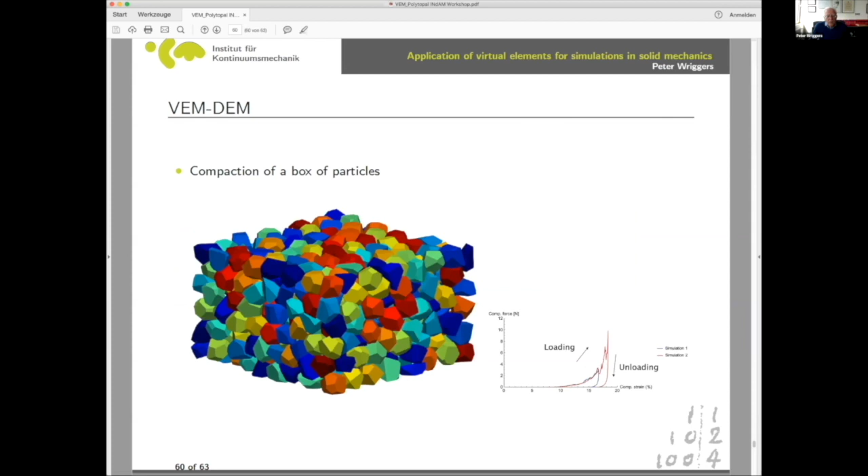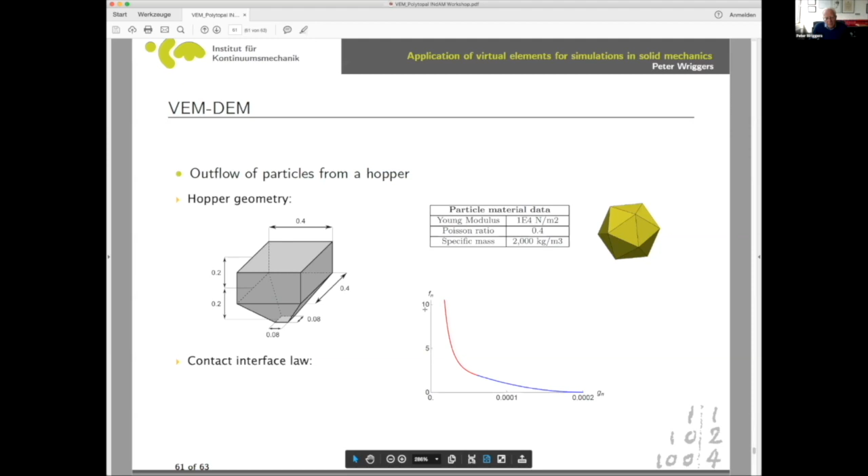Furthermore, we have taken a hopper and we have computed the outflow of the hopper. This is sort of a barrier contact formulation which we have used. What you can see here is first we fill the hopper with particles so they sit there, and then comes the outflow. The rigid particles somehow clog and they don't flow out, whereas the flexible particles can move out of the hopper.

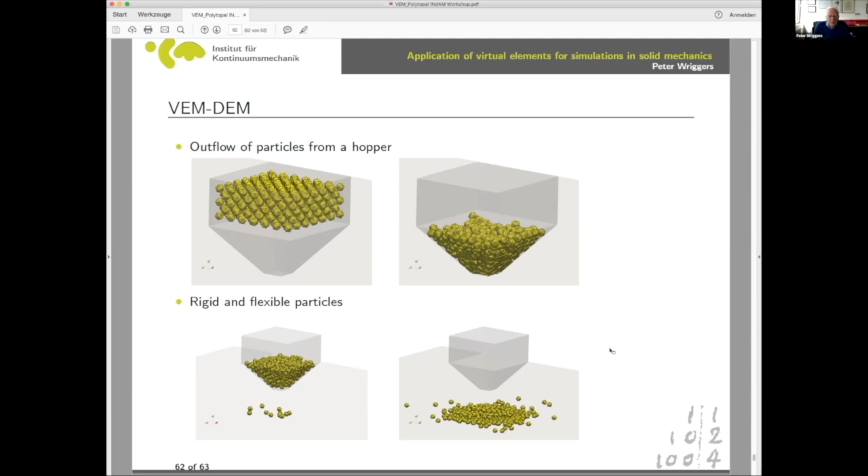So flexibility sometimes helps you to escape whatever your problem. And with this, I'd like to close with a little picture, which is the art and the art of computing using VEM. Thank you very much.